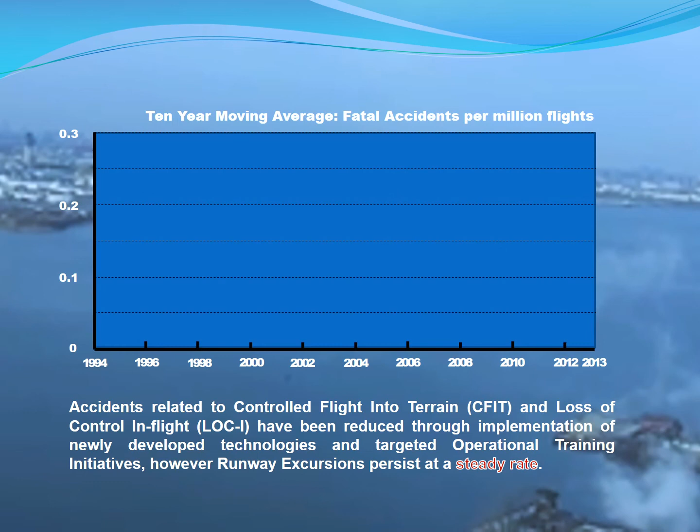This chart depicts the 10-year moving average trend of fatal accidents per million flights associated with controlled flight into terrain, loss of control in flight, and runway excursions. Notice, runway excursions persist at a steady rate.

Post-World War II, it was established that the majority of aircraft accidents occurred during the approach and landing phase of flight, in particular the tendency to undershoot on landing. It was therefore necessary to improve piloting techniques and/or to provide aids to the pilot while approaching to land.

It took 20 years, from 1940 to 1960, for various countries, under the leadership of ICAO, to address the undershoot accident trend. The result was to develop standardized visual approach slope aids, such as VASIs, TVASIs, and PAPIs. These remain in use today as an integral part of airport infrastructure.

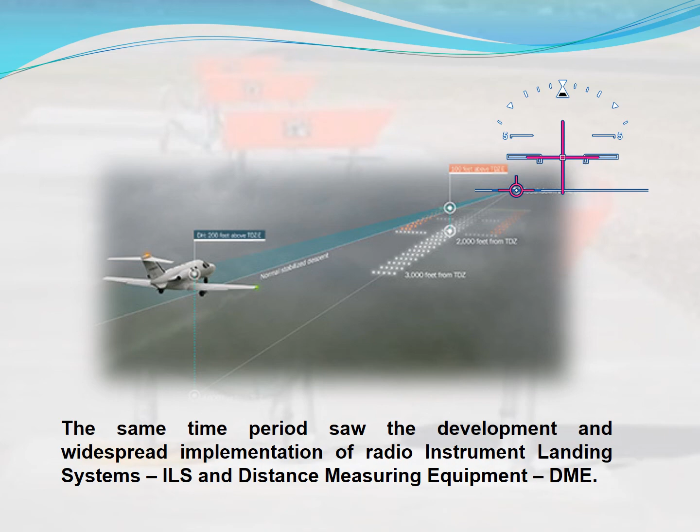The same time period saw the development and widespread implementation of radio instrument landing systems, or ILS, and distance measuring equipment, DME. Thus, historically, ground-based lighting systems are fundamental to aviation and integrate intuitively with the onboard instrumentation.

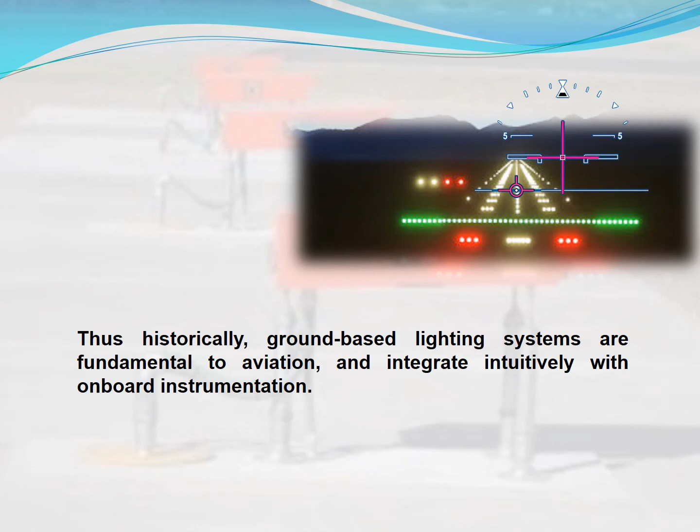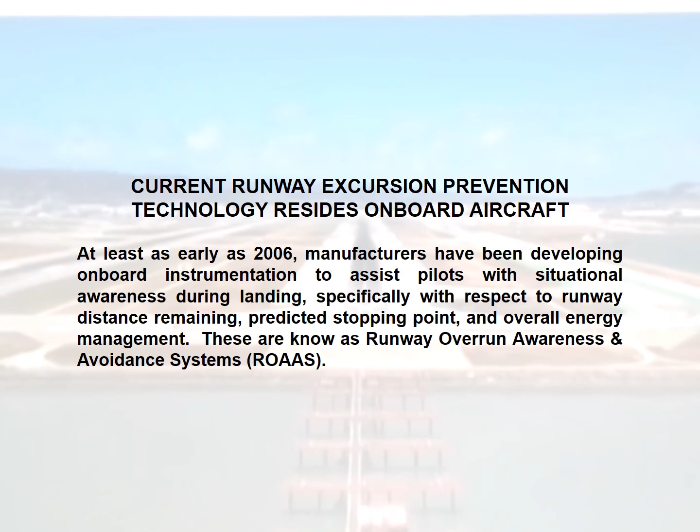Current runway excursion prevention technology resides onboard aircraft. At least as early as 2006, manufacturers have been developing onboard instrumentation to assist pilots with situational awareness during landing, specifically with respect to runway distance remaining, predicted stopping point, and overall energy management. These are known as runway overrun awareness and avoidance systems.

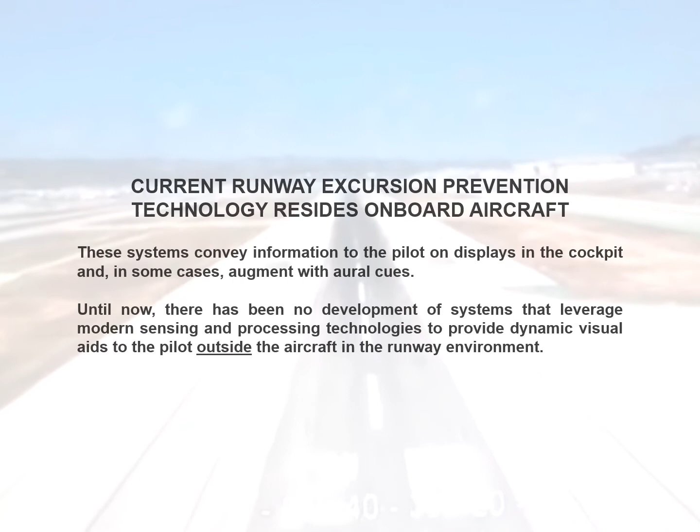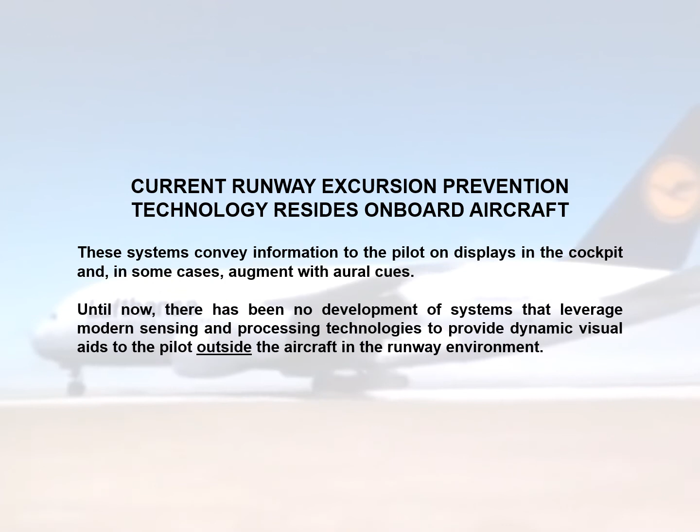50, 40, 30. These systems convey information to the pilot on display in the cockpit, and in some cases augment with aural cues. Until now, there has been no development of a system that leverages modern sensing and processing technologies to provide dynamic visual aids to the pilot outside the aircraft in the runway environment.

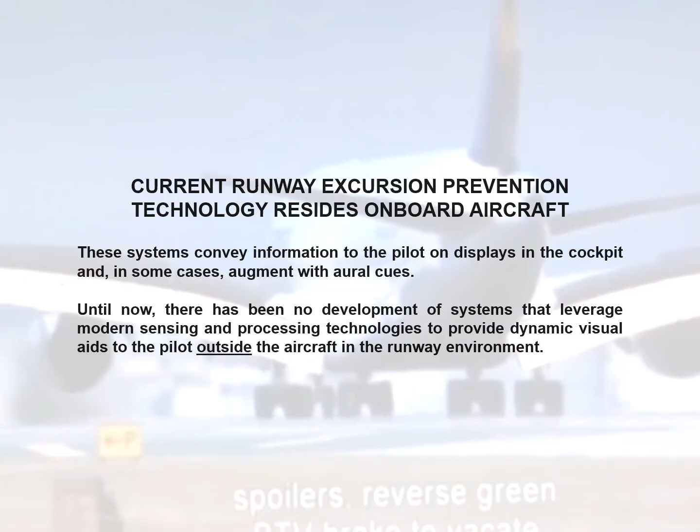During landing or an aborted takeoff, when a pilot transitions from inside to outside the cockpit, there is presently no visual system in the runway environment that conveys real-time information to the pilot regarding the aircraft's deceleration and stopping point. Accordingly, as shown earlier, the rate of runway excursion has not improved over time.

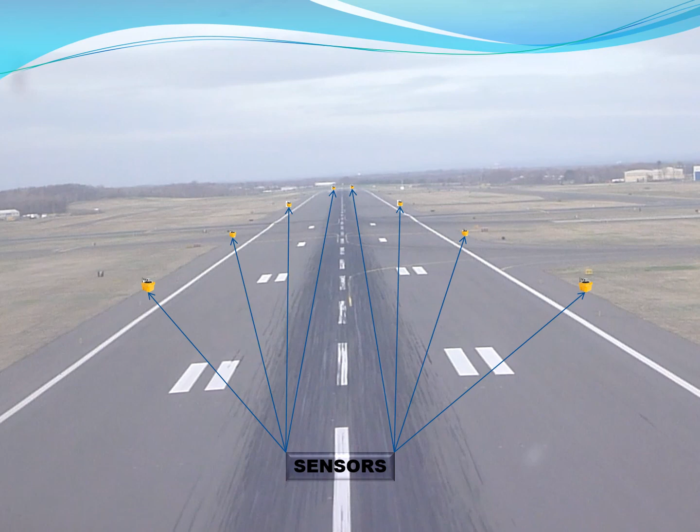The Aircraft Deceleration Advisory Lighting System is comprised of three basic components. Radar sensors, positioned in the runway environment, target any aircraft on or approaching the runway. The sensors continuously detect instantaneous position of the aircraft relative to the runway geometry.

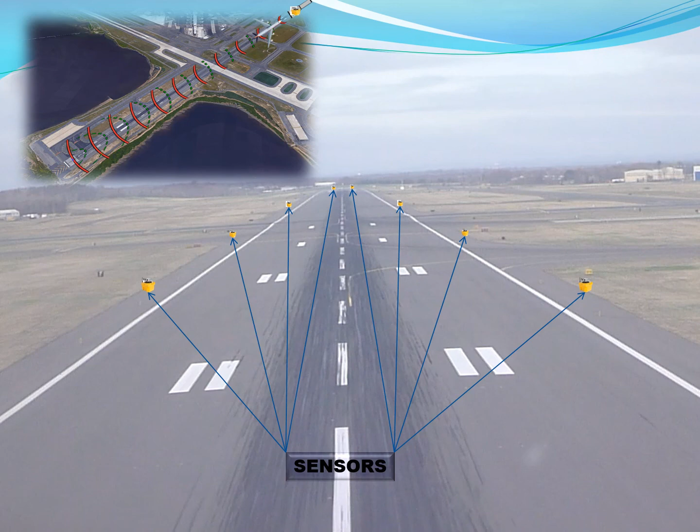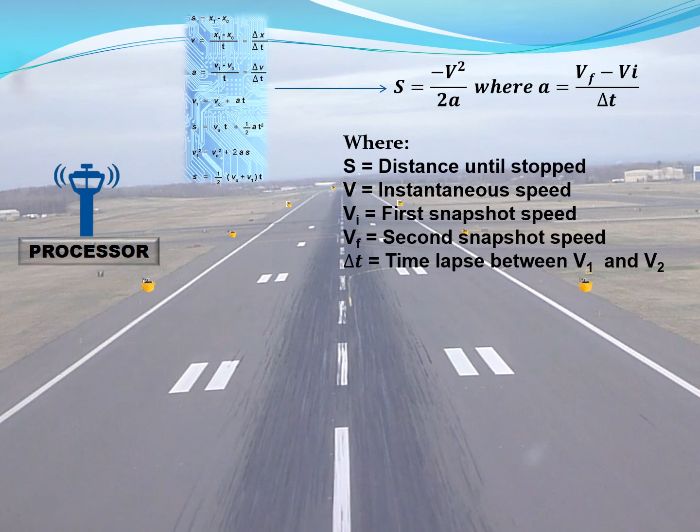The processor uses the feed of instantaneous position updates to calculate aircraft speed, which in turn is differentiated over time to determine instantaneous deceleration. Using speed and deceleration, the basic equations of motion yield an instantaneous stopping point. The calculated stopping point is quite simply either before or beyond the end of the runway, and this information is displayed dynamically to the pilot through the use of high-intensity discharge lights.

The ADALs lights may be located in the distant runway environment and arranged similar to PAPIs or VASIs, or they may be integrated into the runway lighting system similar to takeoff hold lights. Intuitively, a full rack of red flashing lights indicates that the stopping point is currently beyond the end of the runway, and action needs to be taken to correct the situation.

In a healthy situation, as the calculated stopping point moves upfield from the end of the runway, the ADALs lights transition from red to green, affording the pilot a barometer-like indication of progress in the stopping effort. The ADALs lights become active only after the landing aircraft passes the end of the touchdown zone, typically the first third of the runway. Seeing the lights activate gives immediate feedback to the pilot that the aircraft is beyond the touchdown zone.

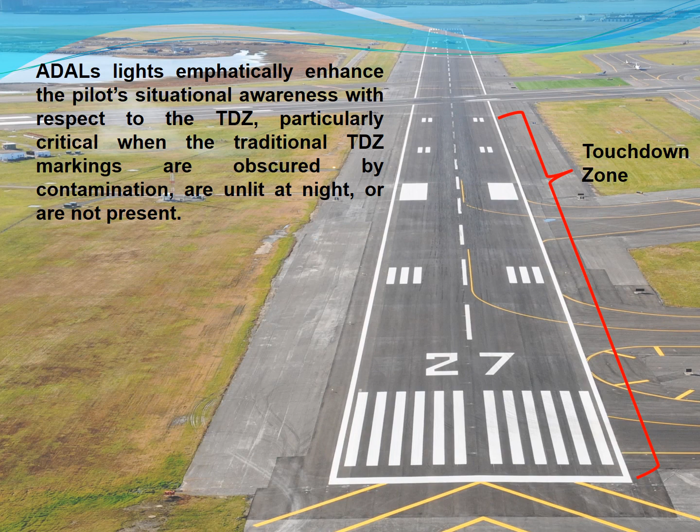ADALs lights emphatically enhance the pilot's situational awareness with respect to the touchdown zone, particularly critical when the touchdown zone markings are obscured by contamination, are unlit at night, or are not present. Thus, activation of the lights gives a clear and concise gate similar to a decision height during approach, and assists the pilot to take decisive action in a critical phase of flight.

If the lights are illuminated and the aircraft has not yet touched down, go around. If the lights are illuminated and the aircraft has touched down, stay on the ground and use all means available, brakes, reversers, ground spoilers, to effect braking effort necessary to drive the lights to green.

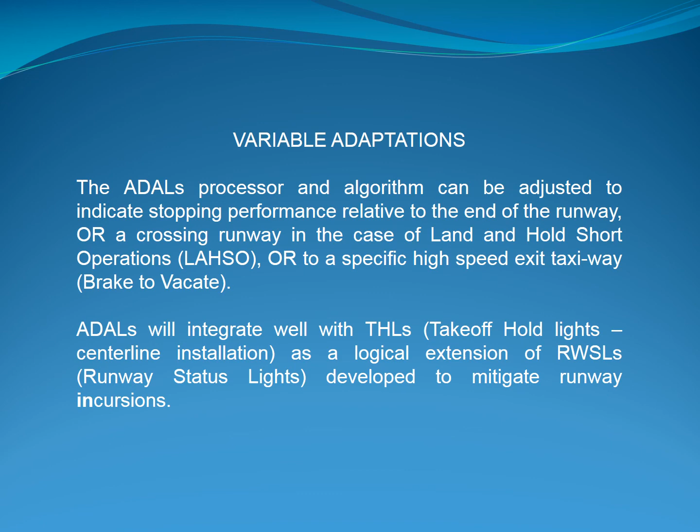The ADALs processor and algorithm can be adjusted to indicate stopping performance relative to the end of the runway, or a crossing runway in the case of land and hold short operations, or to a specific high-speed exit taxi, such as brake to vacate. ADALs will integrate well with takeoff hold lights, centerline installation, as a logical extension of runway status lights developed to mitigate runway incursions.

ADALs can provide inputs to central monitoring systems similar to ASDE-X consoles, in particular if a runway excursion is imminent or has in fact occurred. Input to a central monitoring system may prove particularly advantageous at unattended airports whereby the monitoring alarm or agency could reside with local fire and rescue services.

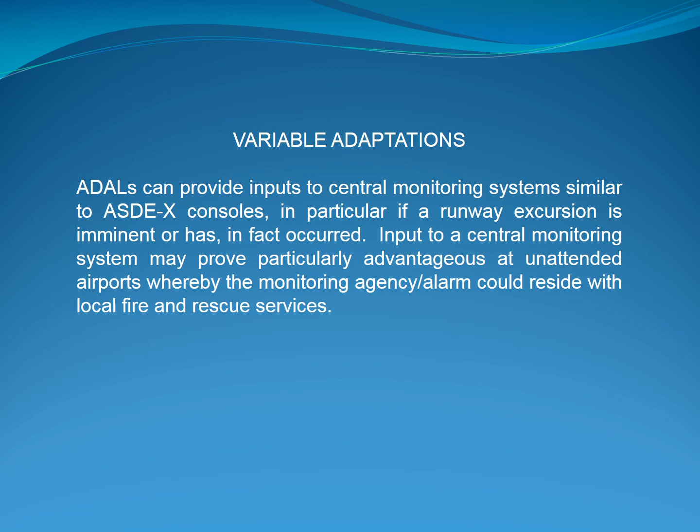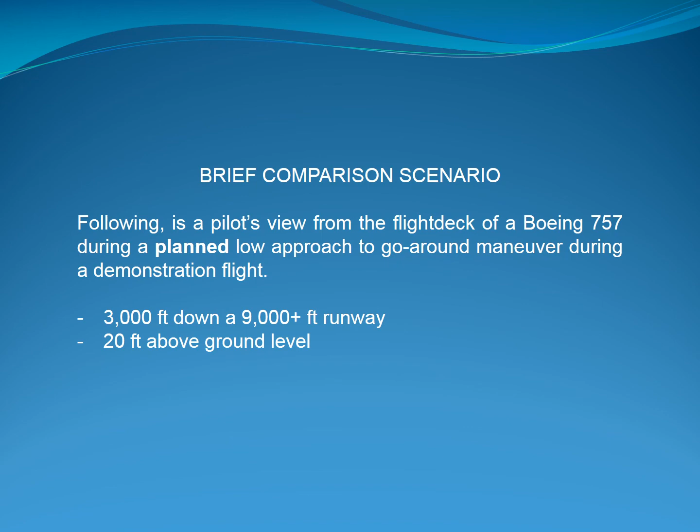Following is a pilot's view from the flight deck of a Boeing 757 during a planned low approach to go-around maneuver during a demonstration flight. The aircraft is 3,000 feet down a 9,000-foot runway, 20 feet above the surface of the runway. It very closely approximates the view the captain had of Air France Flight 358, an Airbus A340 landing at Toronto's Pearson International Airport, with 297 passengers and 12 crew members on board.

With the absence of any dynamic cues in the runway environment, the crew, with a combined aviation experience spanning 60 years, continued to land, touching down 3,800 feet along a 9,000-foot runway, and exited the end of the runway at 86 knots. Following is the flight deck view of the Airbus A340 after the landing at Toronto.

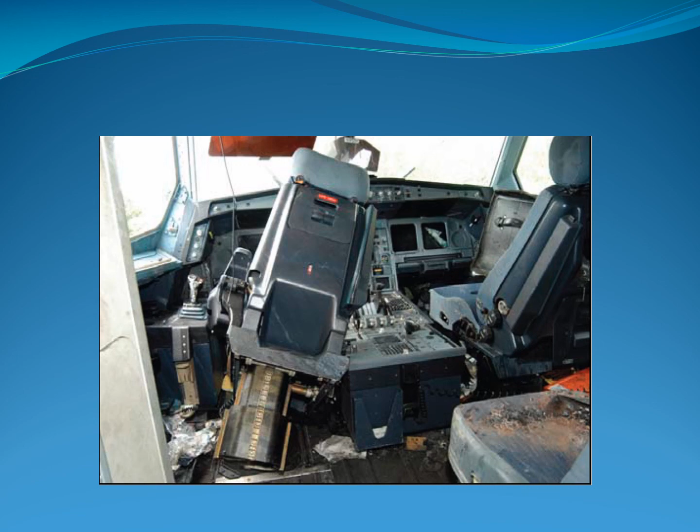Upon passing the end of the touchdown zone while still airborne, ADALs would have advised the crew of Air France 358 they were beyond the touchdown zone and to call go around.

ADALs, sir, go around.

This sequence depicts ADALs functionality overlaid into a cockpit view during landing on a 9,000-foot runway. The touchdown point is 3,500 feet down the runway, just prior to the end of the touchdown zone.

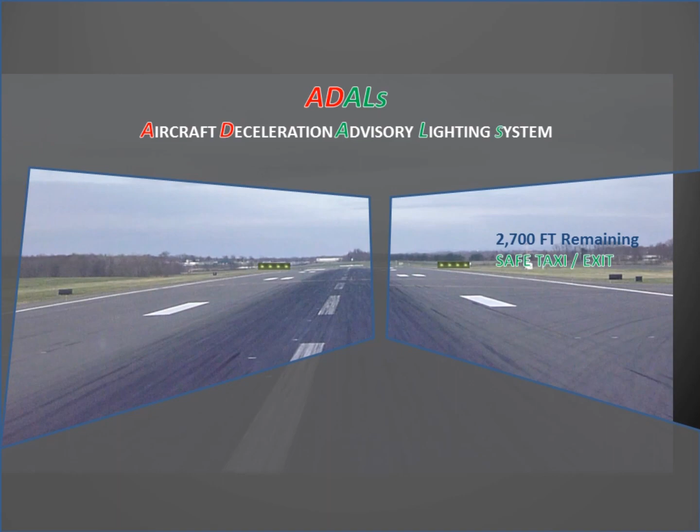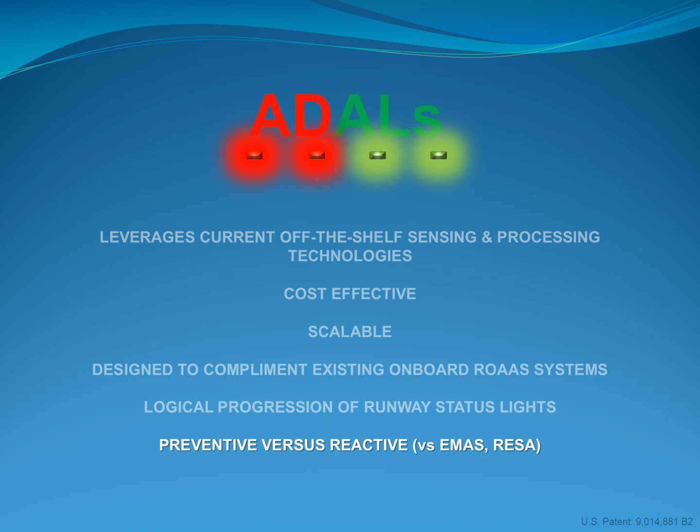ADALs leverages current off-the-shelf sensing and processing technologies, are cost-effective, are scalable, are designed to complement existing onboard ROAAS systems, are a logical progression of runway status lights. ADALs is a preventive versus reactive solution. Limit your risk.